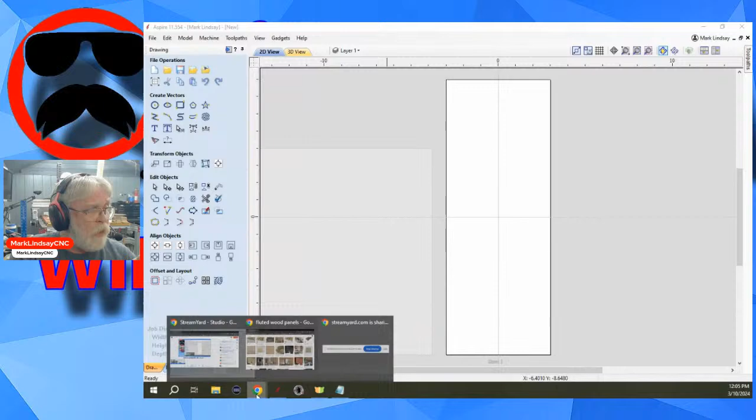That transferred through the ages into wooden architectural elements, be they moldings, furniture legs, table legs, etc. But it's also spawned a little bit of confusion. Now, I don't want to be that guy, but I am that guy. In the strictest sense, we've confused fluting with reeding.

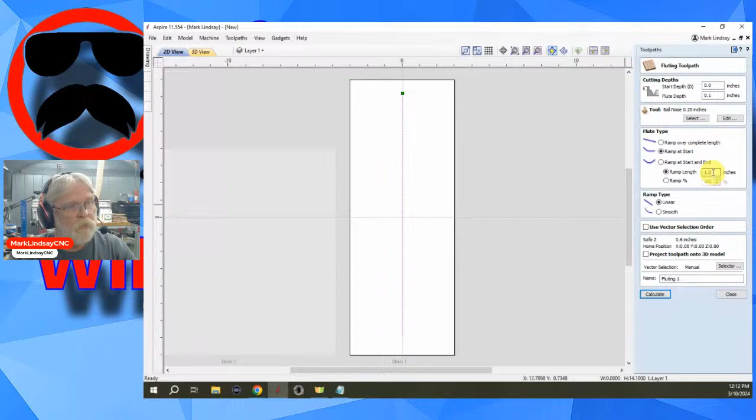Let's look at ramp at the start over a length of 1 inch. I'm going to use a linear ramp, meaning it's going to come down in a linear fashion, just a straight angle over a distance of 1 inch. And I'm going to go ahead and calculate that.

Now let me spin around here a little bit and we can see what that looks like. Again, the red line is a rapid move from 0. Then here's our plunge down into the material. And if we look at it, we can kind of make out there is a little bit of an angle right here. It's not in line with this portion of our toolpath.

Let's slow down the preview a little bit, go about halfway, so we can see what this is going to do. We can see that it went ahead and started its plunge over a distance of 1 inch. By the time it reached that inch, the plunge is finished, and now it's just going to take off and cut the rest of that flute. Then down here at the bottom, it got to the end, then retracted out and went back to 0.

That's probably one of the more basic types of flutes you could use. Let's go back and look at a couple of options, and we'll go into the fluting toolpath.

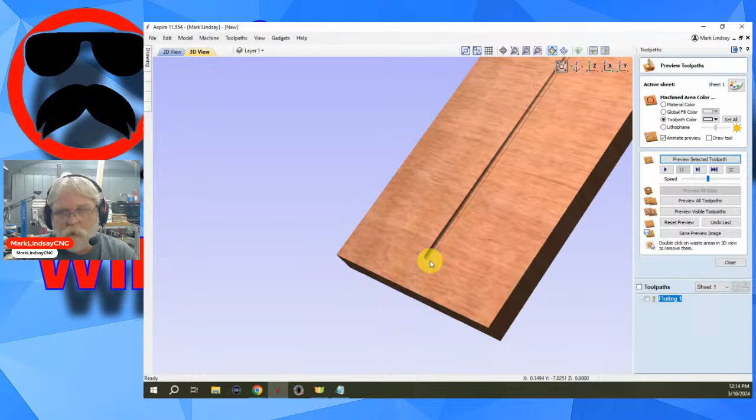So that's a good start on the fluting toolpath, and you can create all kinds of effects with this.

Let's jump out again, go back here, and we're going to ramp at the start and the end. I'm going to shorten this length a little bit, let's make it 1/2 inch from the ends, meaning it's going to start at 0, then plunge down to 0.1 over a distance of 1/2 inch. And I'm going to switch to a smooth ramp, meaning it's going to give this curved appearance with this flute rather than that straight linear appearance.

So we'll calculate that, I'll reset my preview. Now there's something a little bit more remarkable about the appearance of this flute. We can see that it's going to wrap it up from 0, plunge down, and then kind of smoothly dip down over a distance of a 1/2 inch until it reaches our 0.1 cutting depth. Then at the end down here, when we get a 1/2 inch away from the end, it's going to start ramping back up, then retract out.

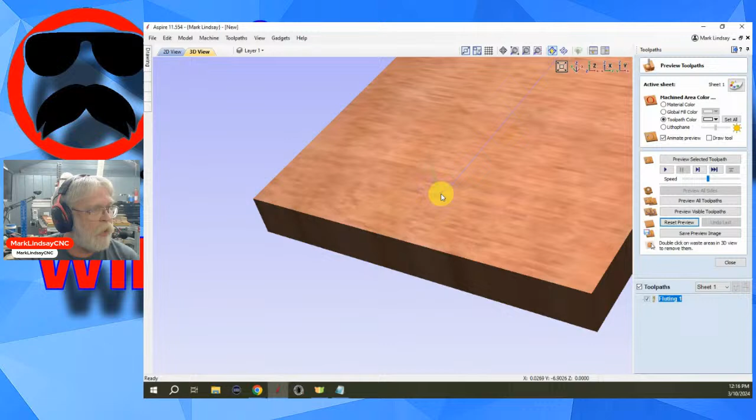So in looking at this toolpath when we carve it, we'll go ahead and preview it. We have a nice smooth ramp down here, then we have a nice smooth ramp back in the center. There we go, a nice smooth ramp up here.

And that's simply by using ramping at the start and end, which generally speaking is the most common, and adjusting our ramp length. You can basically create a ramp length that's equal to the diameter of the bit you're going to be using. Making a ramp that is smaller than the diameter of the bit, while it will work, I have found that it doesn't look right, but feel free to play with it if you'd like.

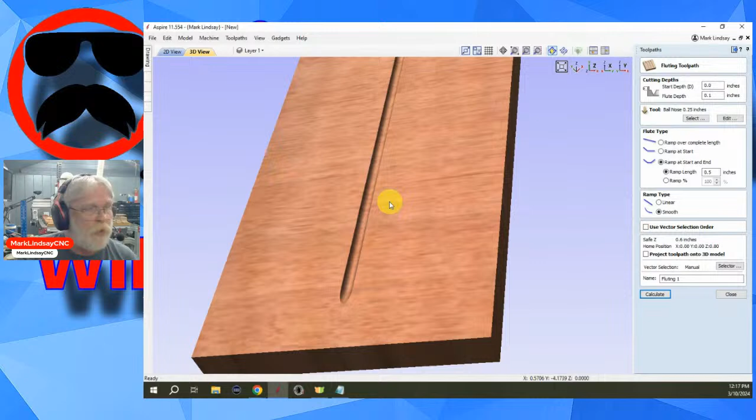Now, fluting is most commonly associated with a concave shape, just a straight ball nose bit, but you're not limited to using a ball nose bit with this toolpath. You can actually create some pretty interesting patterns by, let's use a 90-degree V-bit, and trying for a little bit different of a pattern than just this straight concave. I'm not going to make any other changes. Let's go ahead and calculate, reset my preview, and we'll zoom back out.

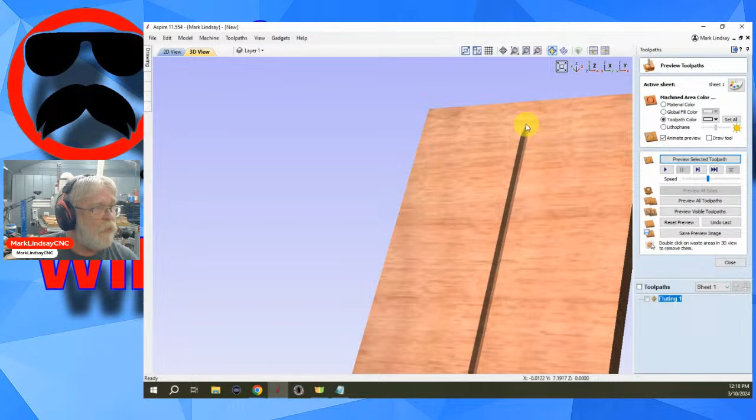And we'll preview that. So now we still have a neat flute, but instead of having that round bottom, it now has a V-groove shape to it. It's still a nice, smooth start here, and then a nice, smooth finish down here. And you can play with this. Again, it's not limited to ball nose or V-groove bits. The only limit is basically your imagination.

Bo is asking, can you create a toolpath for a lamello biscuit through the fluting toolpath? Yes, you certainly can.

What you'll need to do is figure out a length, where you want that ramp to start, how much of a distance, how deep you need it to go. So it'll take a little bit of playing and figuring out, and this is a great opportunity to practice in scrap. You could cut lamello slots on a piece of 2x4 or an old fence board to get your measurements nailed down for each size. For those who don't know, a lamello is a biscuit jointer biscuit. But yes, you could certainly do that.

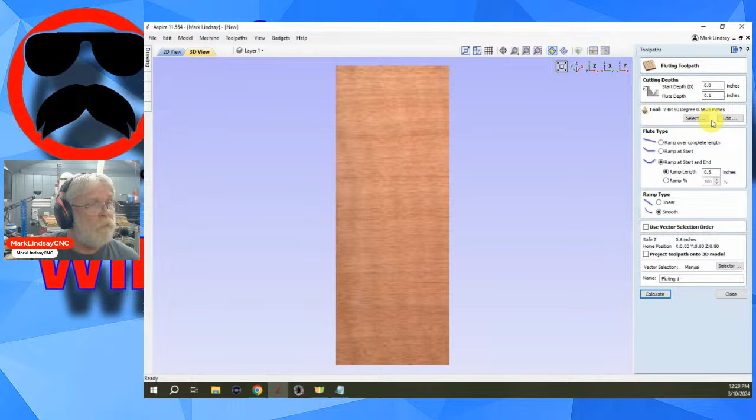Let's go back into the fluting toolpath. Multiple passes for more depth. Okay, now I have a 0.1 depth here. If I look at this particular bit, the pass depth is 0.108. So what we'll do, I'm not going to change the bit. Let's look at a flute depth of 0.25.

So we're going to go pretty deep, and we'll use that same bit. We'll calculate, and now let's take a look at the toolpath. And we see it's going to make multiple passes. Let's slow it down a bit more since it's a fairly short toolpath. So you'll come in, make your first pass, then come back and make the second pass. Oh, that's actually doing 3 passes.

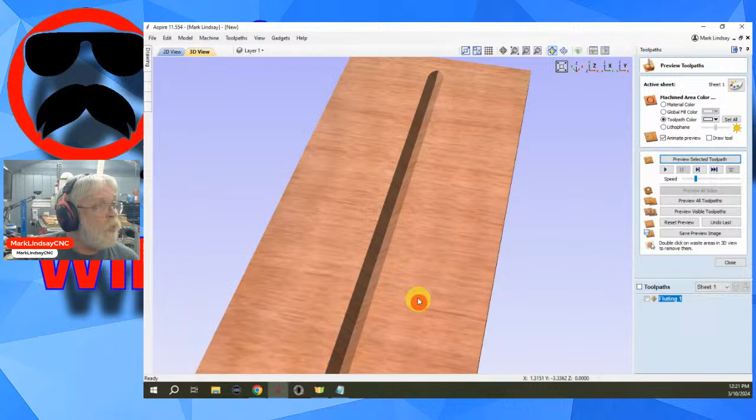So that's all based upon the pass depth of the bit you're using and the depth you have set in your toolpath. But good question, and keep them coming like that. Let me go ahead and reset the preview.

Bill Wallace wants to know, can you flute a cut that is on a circular arc? Yes, you can. Again, it will work with any vector, be it an open or closed vector. It's all in how you want to set it up.

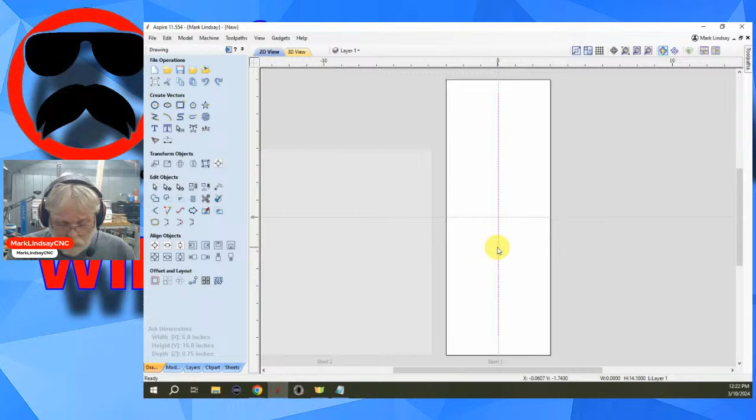Let's get rid of this one here and draw - is that an arc? That's an arc. Okay, we're going to start here, come down here, and pull it out like so. There we go, so we've got that circular arc there. We'll come back, go back into the fluting toolpath and do this.

And I'm going to bring it down to 0.15, so it'll still need to do 2 passes. And I'm going to ramp at the start and at the end like I did. I'm not going to make any other changes here. We'll calculate.

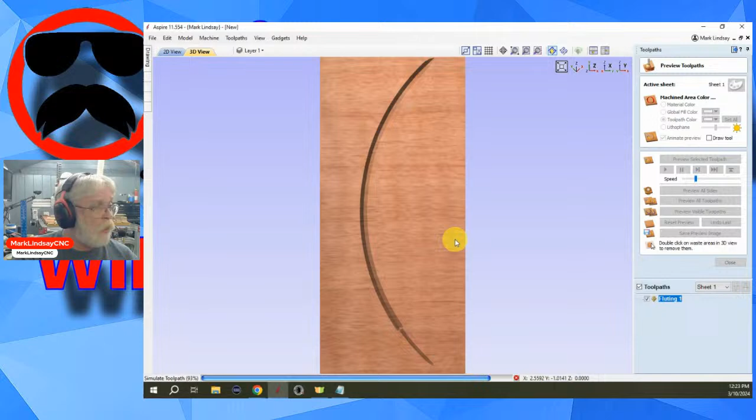And we'll preview, and it's making its first pass, and come back and make its second pass. And again, it will follow any vector, be it circular arc, a straight line, a polyline, or a Bezier curve. All right, so you have a whole bunch of options opening up. Let me reset the preview here, close it, back to a straight Z view.

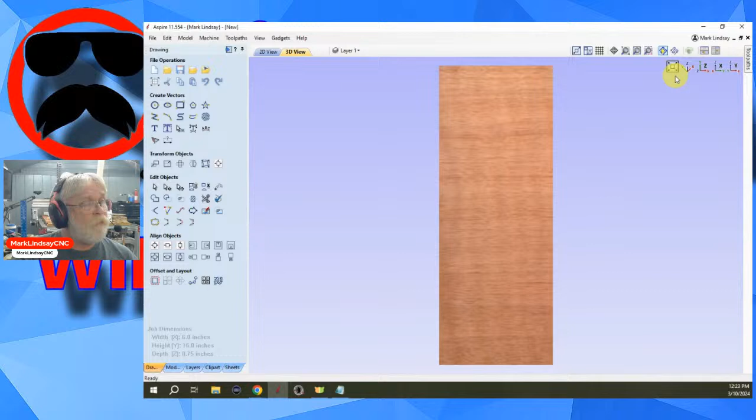In the case of, what if we want a flute that is similar to this, it goes off the end of the material. Well, that's fairly simple as well. All we'll do is draw our vectors oversize. We want to go at least the diameter of the bit we're going to use.

So we'll start up here and come down here. The reason we want to go larger than the diameter of our bit is because we want that plunge to take place off of the material, so that it enters the material from the edge, not from the top. And close that, go back over. I'll use the same toolpath, just change it. Let's see now. You could actually just use a profile toolpath for this - you don't necessarily have to use a fluting toolpath.

But let's say we want to make this ramp over the complete length. We want to start at 0.05. Now, one decimal point - Vectric doesn't like two decimal points. And we'll make that a quarter of an inch. Now let's leave it at 0.15, so it's going to plunge a total of 100 thou.

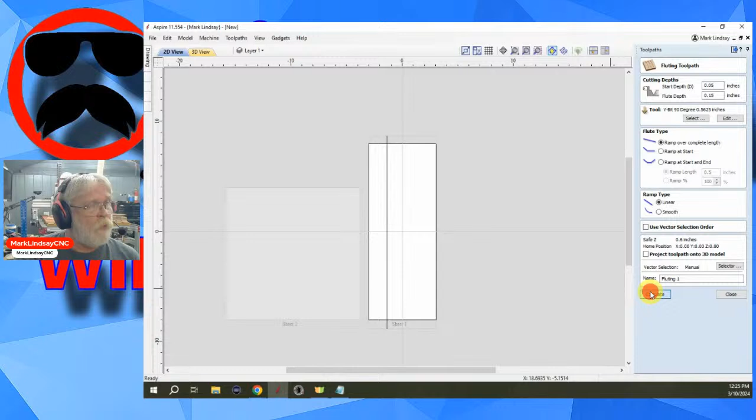And we're going to make it a linear ramp. It's going to ramp over the complete length of this vector. So we'll calculate that - whoops, I got to select the vector, Mark, you've been doing this a week or two. Okay, we'll calculate that. And again, it's going to plunge down here this time. And we'll preview that toolpath.

And we see not only does it start and stop off of the material, but in this case, it started at the bottom and cut deeper here, then ended up shallower here. So, can starting off of the material create tear out? Yes, it can.

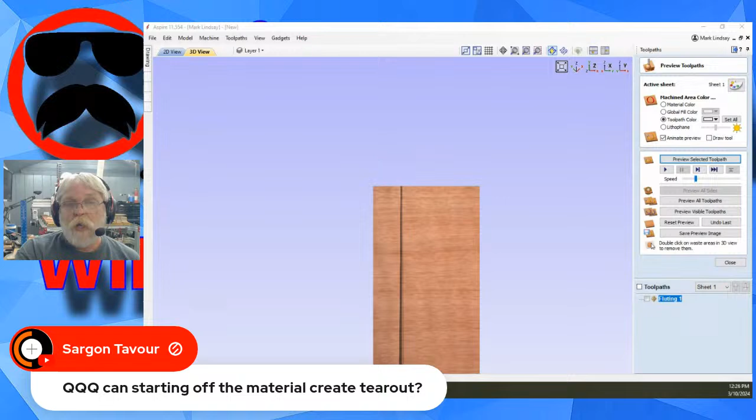It can create tear out. Usually what I do in that case, it just depends on what I'm doing, Sargon. A lot of times if I'm doing something like this and I'm concerned about tear out, I'll make the material just slightly longer than I need and then cut out that tear out. If I absolutely can't do that, then I'll butt another piece up against it. Much like if you're using a hand router or a router table, when you butt that piece up against it, it tends to not chip out. The chip out will happen in that scrap piece. So there is that to take into consideration.

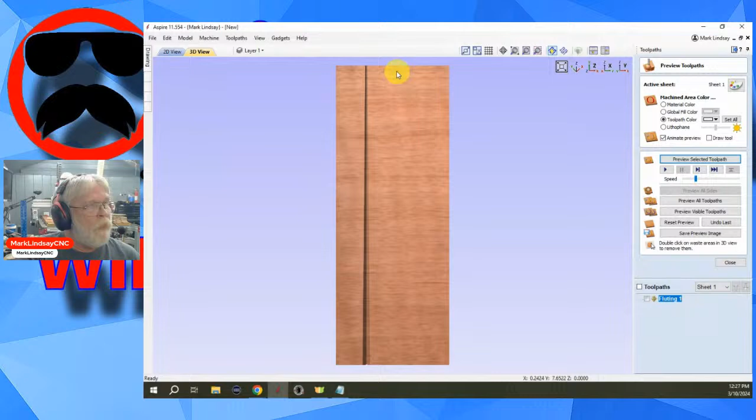Back to Z, I guess I hit the wrong one. So effects can happen. You can create all kinds of different effects using the toolpath. Now, Mike Mazalik has brought up an excellent point here. Just a note, overlapping vectors will cause problems - a figure eight of two circles or an X as an example. Yes, they can cause issues. Now, remember, the fluting toolpath works on one vector at a time.

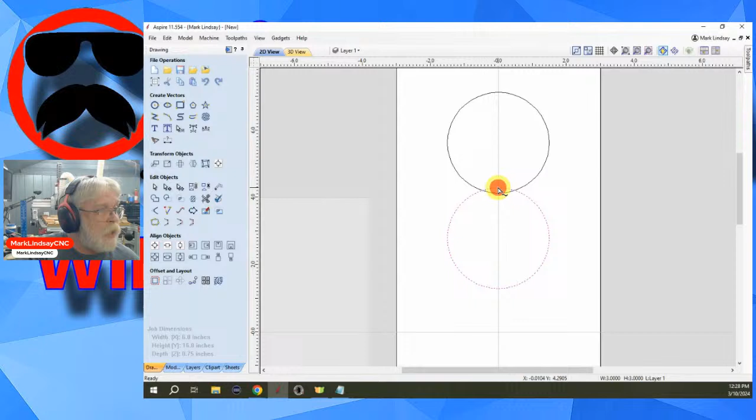So let's take this into consideration, what Michael is talking about. We'll delete that and we'll create a circle here, close it, and I'll just center it side to side. Select that, hold down Control to copy, drag a copy down, and with geometry snapping on, I just snap it right there to the edge. So we have an overlap right there. Now we have two closed vectors, but we're going to go ahead and do fluting toolpaths on both of those vectors at the same time. Again, it's going to handle each vector separately.

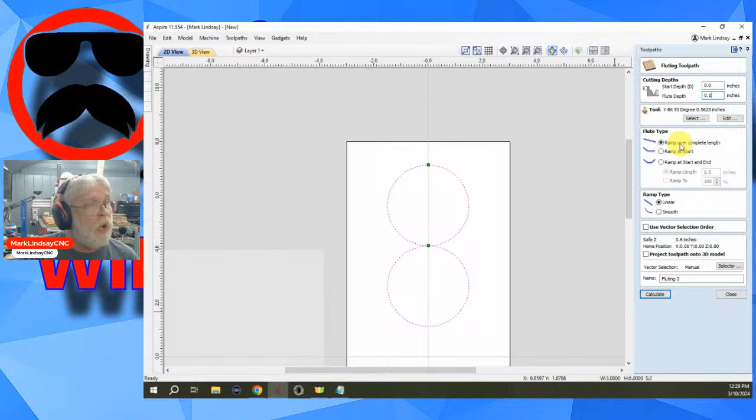We'll do the fluting toolpath and we'll do 0.1, so I'll get rid of that 5. Now, if we take a look here, we've got the green start point up here, the green start point here. That means it's going to start shallow here. It's going to start shallow here. So let's take a look at what we get. I'm not going to change - let me ramp at the start and we'll bring that in for 1/2 inch, so we see what that looks like. I'll keep it linear. We'll calculate, and now we'll preview. It's going to start with the bottom one first.

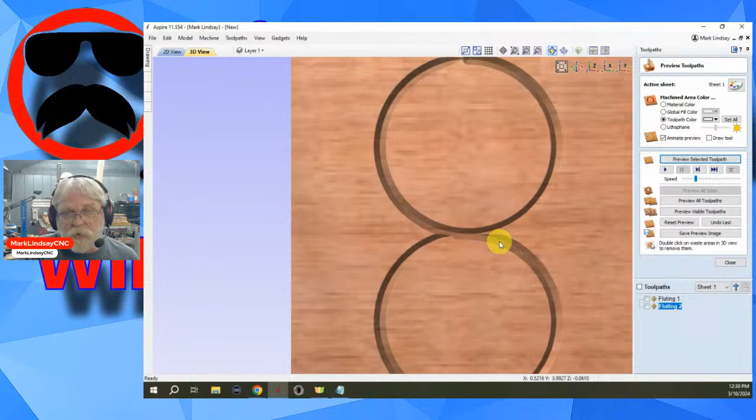Now, first we can see the problem it caused by using a closed circular vector. We have a real shallow start here and no liftoff. So technically that should have been a ramp at the start and the finish. But more to Michael's point, if we take a look at this down here, we have pretty much a mess where this deep carve overlapped with this shallow carve and then met with the deep carve again. So there are various problems in there. Now, if you want to get in and sand that out, be my guest. But we have a depth here of approximately 0.0945, and we have a depth here of 0.0981.

So we're going with different depths, 0.877. We've got a bunch of different depths here. So that's not the look that I would go for. It's not the look that I'm looking for. Just know that overlapping vectors can create an issue. Let's delete that one.

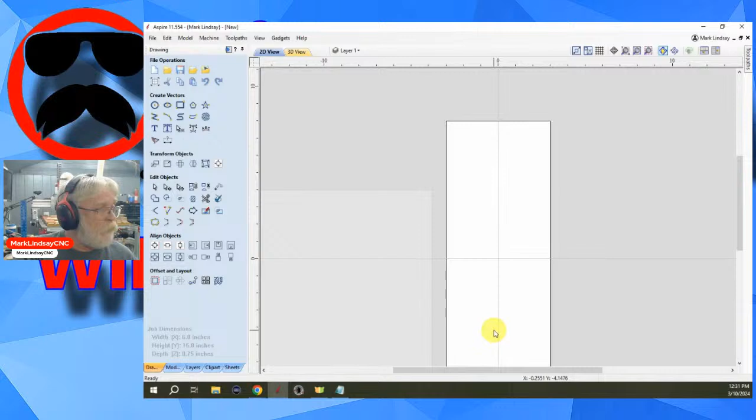Let's go back over and we'll draw a cross here, or an X rather, and let's get 45 degree. Okay, and we're going to wake that one up. We'll come here and we'll come down here 45 degrees. That's good. All right, now let's close that. Come over, we'll go into this fluting toolpath here. And we're going to do start and end to make it look a little nicer. I'm not going to make any other changes - just calculate and see what we get.

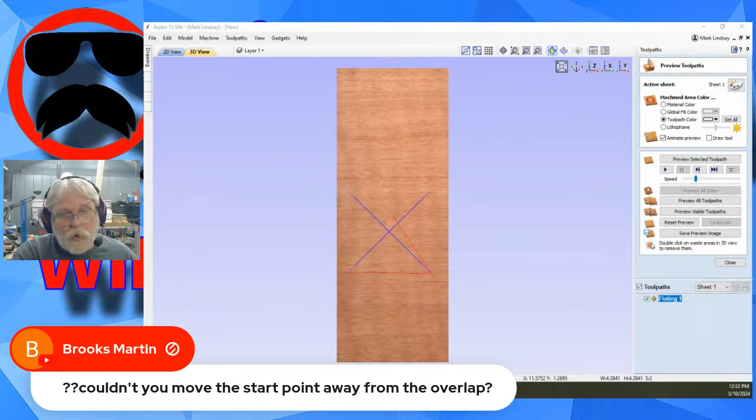Couldn't you move the start points away from the overlap? Yes, I could, and that's a very good point. However, it still creates the issues where those points meet. Let's take a look and see what happens with this one. Basically, it's the unpredictability of the situation. Now, this one looks like it's going to do okay. And yes, it did - that one worked out just fine. That looks just fine. Just know that it can create issues.

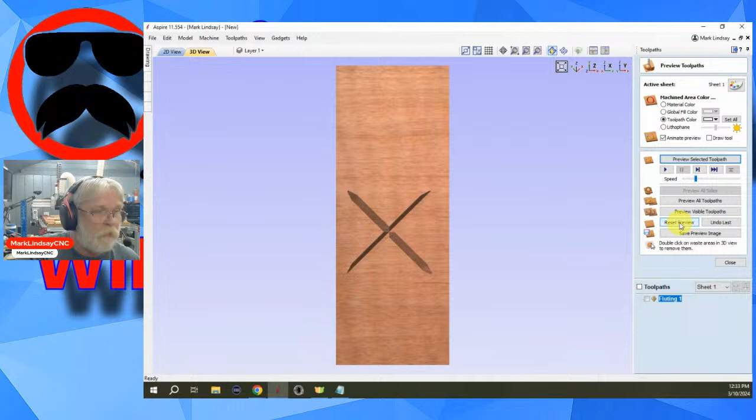There can be slight differences in depth. There can be chip out and break out on some of these points. But this is a case of experiment and see what's going on - just check it out. So it may work perfectly, it may not work perfectly. That's all I'm saying. Let's close that.

Can you not use a ramp? You cannot use a ramp with a profile toolpath. The whole point of the fluting toolpath is that ramp.

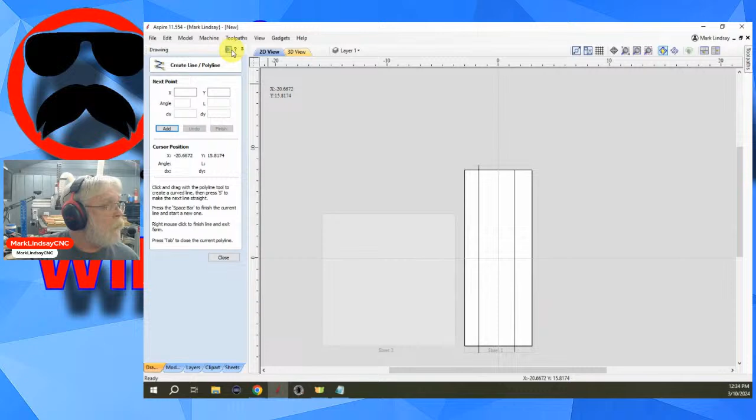Let's go back to this example. We'll delete these and I'll make a straight line that starts here, comes down here, and then another straight line starting here and going down to there. We're going to do the fluting toolpath on this one, ramping over the entire length. I'm going to leave those alone, but I'm not going to preview that yet.

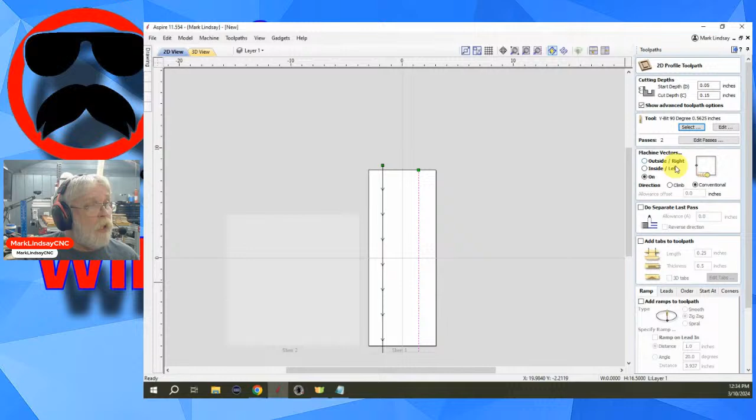If you didn't want a ramp, use a profile toolpath instead. We're going to start at 0.05 and go down to 0.15, cutting on the vector. I'm going to select the same V bit, select, cutting on the vector, and then we calculate.

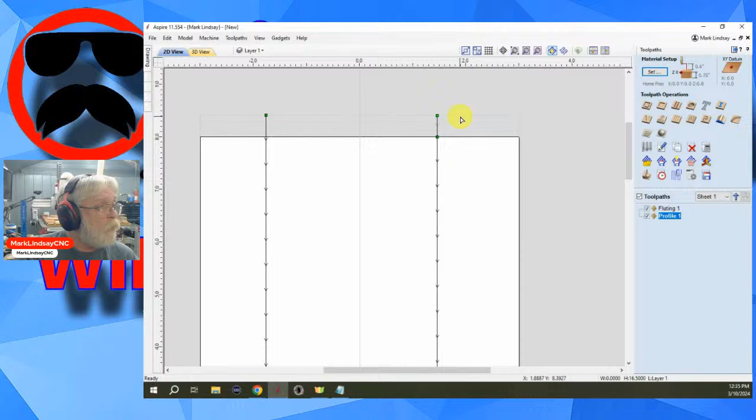Did I make a mistake with my vector? Yes, I did. Let me go back into my profile. I need to bring that up. All right, what am I doing? Boy, let's close this. What am I doing? Control, or let's select this one, go into node editing. We'll get there. Boy, I messed that up. Let me go back over here. Uncheck, that's what I'm doing. All right, there we go. Nope, I just moved it, I didn't lengthen it. Let's drag that down there. Okay, I moved my vector, I didn't lengthen the vector. That was what the holdup was. All right, there we go. Now I have that correct.

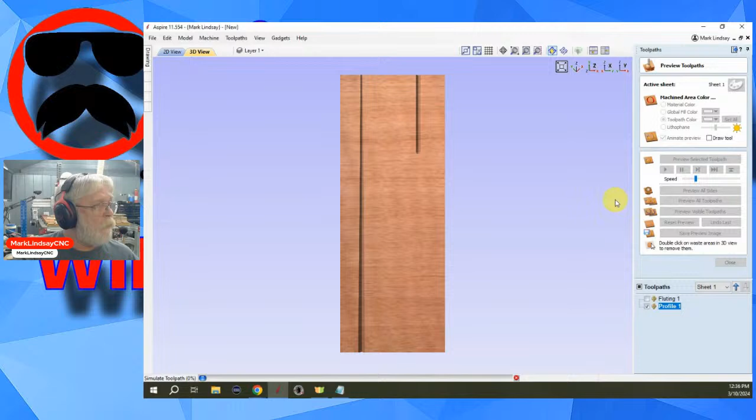And we will calculate that. That's better, okay. Now we'll preview all toolpaths. And there I have the ramp, and here I don't have the ramp. So if you don't want that ramp, you would use the profile toolpath.

The main feature of using the fluting toolpath is that ramp. When that is desirable, you would use the fluting. When it's not desirable, you would use the profile. So hope that helps there, Dan. Never mind all the mistakes I made along the way.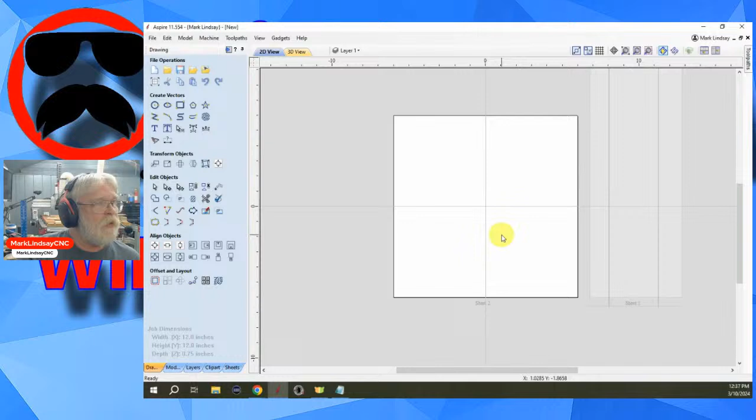Now I have another sheet over here to show you something else, and this has been the cause of quite a few questions that I've had. That is about using the fluting toolpath to do a ramped in, basically to hollow it out. How do you make that ramp wider? This is what I mean when I say a fluting toolpath works with one vector at a time.

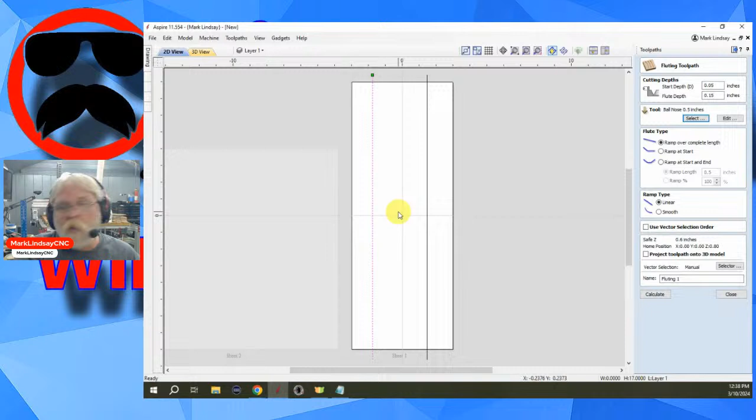To make a wider flute, you have two choices. One is to use a larger bit. So in this case, the way I would make this wider would be to use, instead of a 1/4 inch ball nose, my 1/2 inch ball nose, and that would make that flute wider. If I needed wider, I could move on to a 3/4 inch ball nose or core box bit, or I could move to a 1 inch or 1.5 inch. That would give me that nice smooth concave I'm looking for, and I could adjust the depth to suit.

Well, what happens if I use 2 vectors? If I use 2 vectors, the problem then becomes the cusp down at the bottom of that flute. Because you have a round bit carving, then you have a vector next to it carving, you're going to have that point where the two tips meet. And that's what's going to give you this pattern here on a much smaller scale. Now you can do it, but you're going to need to use a lot of vectors, seriously a lot of vectors. Now it can work, there are a couple of issues though, and we'll get into those right now.

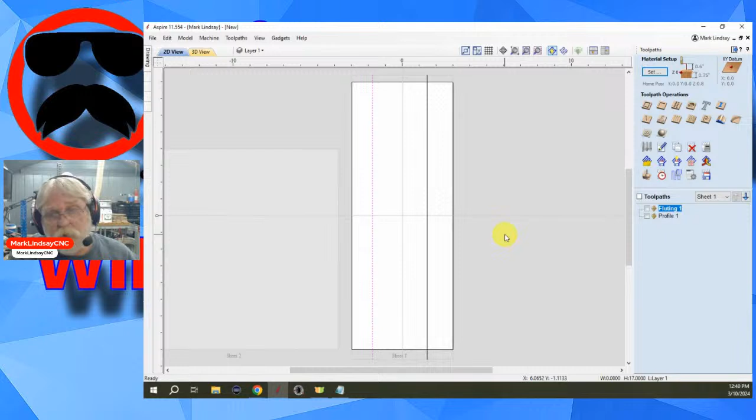Also, you don't have to use a ball nose bit, you can use a standard end mill. So that's where this sheet comes in. Let's go ahead and get over here and create a rectangle. I'm going to make that width in X - let's make it 8 inches wide, and let's make it 3 inches tall. I'm going to anchor the center on my X0, Y0, and we'll create it. Okay, so I've got my rectangle here.

I can use this rectangle, but it's going to follow the perimeter. Well, what if I want to ramp this entire section down? Can I do that? Yes, I can. I can use a standard end mill, but what I'm going to have to do is create vectors from side to side.

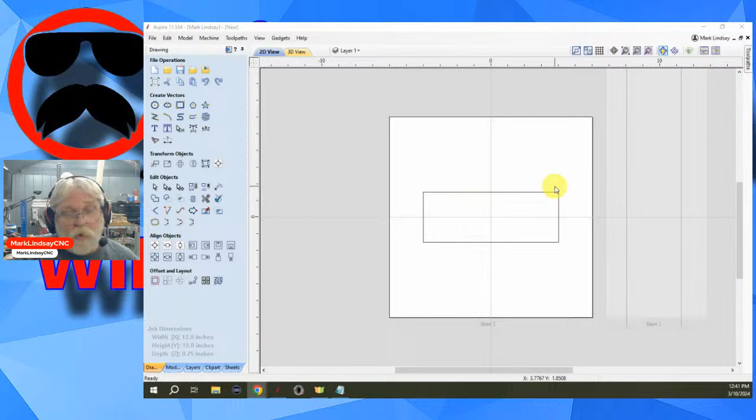Can't you just use a bowl bit? Certainly, yes you can. But let's say, for the sake of this, I want square sides. I don't want that radius. I want square sides along the edges.

I can cut this out, but I'm going to use a couple of vectors here as a demonstration. What I'm going to need to do is come down, and I'm going to use a guide for this. I can't drag a guide, so I'm going to put a guide here, and now I'm going to move it down.

I'm going to use a 1/4 inch end mill, so I need to take half of that. Half of a quarter is 1/8 of an inch. Because I'm making a negative move, I'm going to say minus 0.125, equals, and I'll apply it, and that's where my guide is.

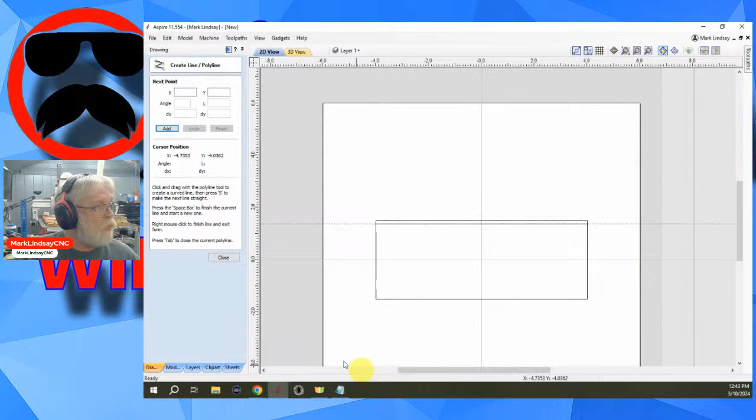Now I'm going to come back and draw a vector right there. No, get down here. There we go. No, not there—right there on that intersection. Then I'll zip over here and draw it right there, and spacebar to accept that line. And I'll delete that guide; I no longer need it.

So I now have a vector here. I want to carve out this entire area here. I've got a 3-inch wide piece, and I've got a 1/8 of an inch radius on my tool.

So I'll select it, and I'll come down here and create a linear array. Now I want rows in Y. I do not want columns in X. I'm not looking to move over this way; I'm looking to create them down. So I want one column in X.

I'm sure there's a way to figure out exactly how many of these vectors I'm going to have to place 1/8 of an inch apart times 3. So let's take 8 times 3 and call that 24. I'll go with 24 rows in Y, and let's see what that does—3 inches wide, 8 per inch, 8 times 3 is 24.

I'm going to put a gap—nothing in X, a gap of 0. I'm going to put a gap of 1/8 of an inch in Y. Because I'm starting at the top and moving down, this is a negative move, so that needs to be negative 1/8 of an inch. So it's going to create 24 more vectors down this direction. We'll click copy, and there we go.

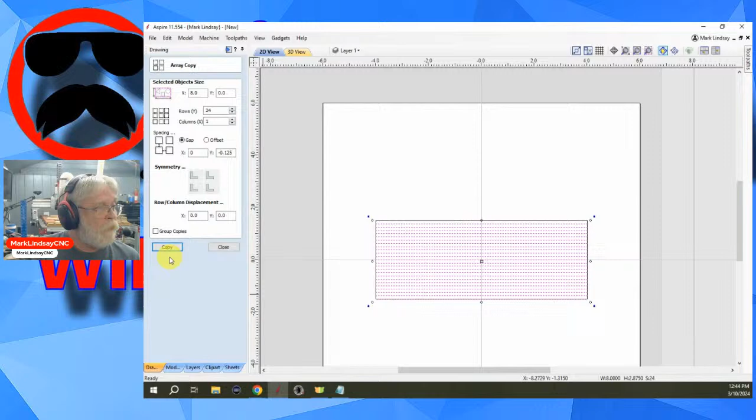Well, I could have done 23—I don't need this last one here. Hold down Shift, deselect my rectangle, then I can hit delete, and that deleted that last one there. So now I have all my vectors.

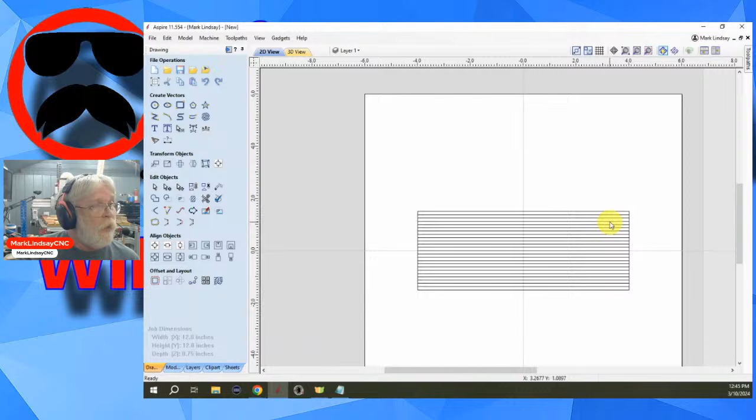I can go right here to right here, select all of those, come over to my Fluting Toolpath, and make sure that all of my start points are at the same end. I want to ramp over the complete length, I want it to be linear, and I've got my depth, 0.15.

We'll calculate, and we can see what the bit is going to do. Now I'll preview that. And I made a mistake—stop, reset the preview. I didn't change my bit.

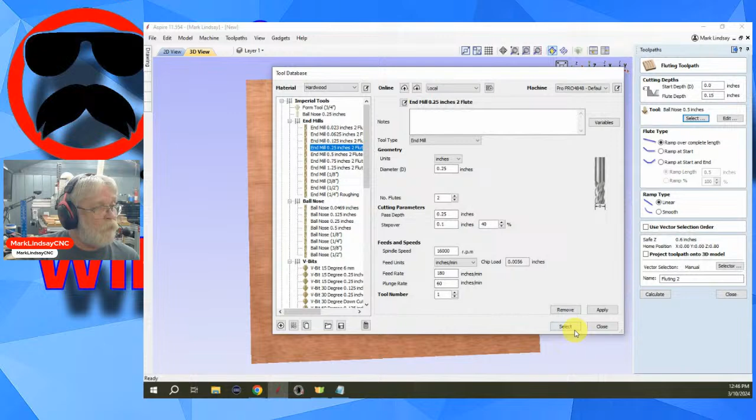Let's go back to a 1/4 inch end mill. There we go. Select, calculate, now we'll try that. Let's preview—there we go. That's better. Okay, and we see what it's doing now: it's starting up here and gradually sloping down.

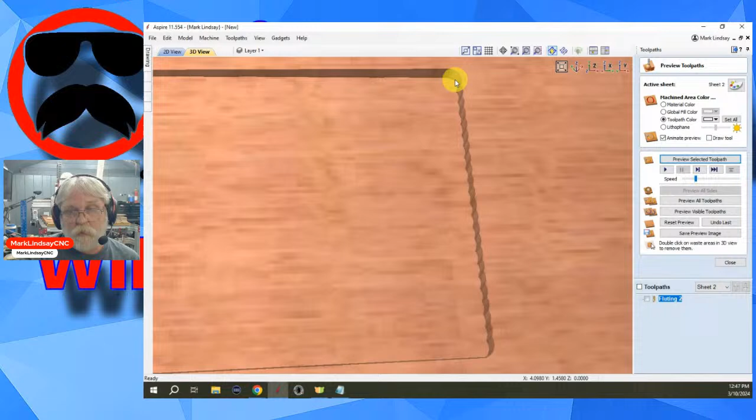Now this does work, it works very well, but there are two problems. I don't know if you can see—I'm going to try to get this into a position that you can see this. But we have two issues down at this end. My sides here are nice and straight, but now I have a flat spot right here where these tool paths ended, because we're dealing with a round bit. I also have a jagged edge here where all of these cusps met, where all of this was left behind because of the radius of the bit.

Now that happened because I used a spacing of 1/8 of an inch, half the diameter of the bit. You can pack these vectors in tighter—instead of 24, we could go with 48, we could go with 96, and really jam these in here together. It may work, but that's a lot of step over, or a real fine step over.

Well, let's go ahead and give it a try. We'll close that, let's go back, and I'm going to Control Z until I eliminated those. And I'm going to zoom back in to this one here. Let's double—let's just go to 48 instead of 24. I want to move this down now, I'm going to make it a 1/16 of an inch.

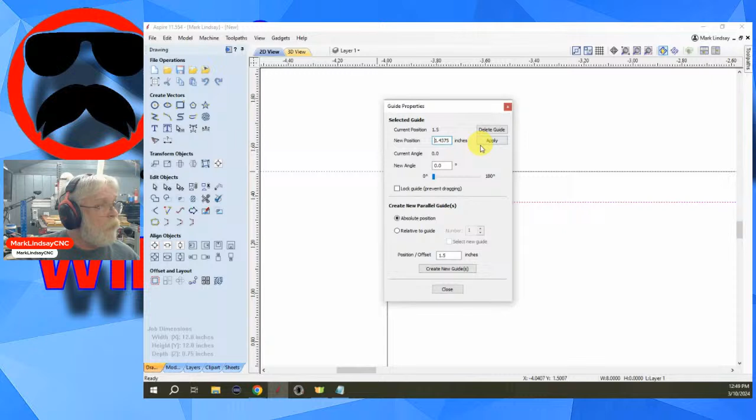Minus 0.0625 equals, we'll apply that, close, and now I can move this vector right up and snap it to that guide. Close, then I can delete that guide.

Now I can select this. We're going to go with 48. Nope, we're going to go with 47 because I don't need that last one. So we'll go 47, and we're going to change that to negative 0.0625. Copy. Close. Now with them all selected, I'll probably have to reselect, and I did.

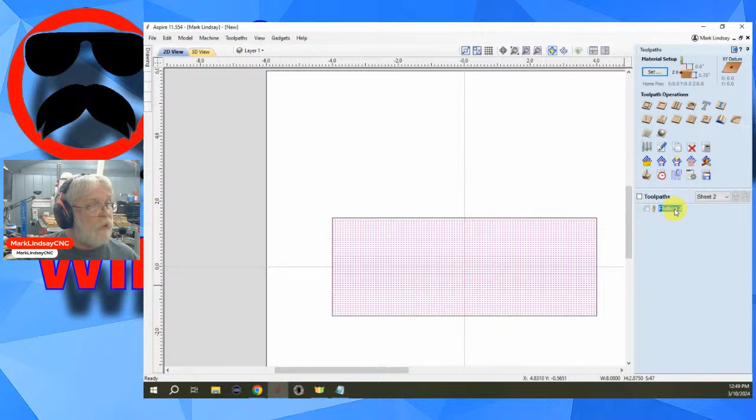Hold down Shift and select all the rest of these. Start points are all in the same place. Calculate. Now let's preview. Stop.

I didn't reset my preview. There we go. Now let's preview. So we're moving over by smaller increments each time.

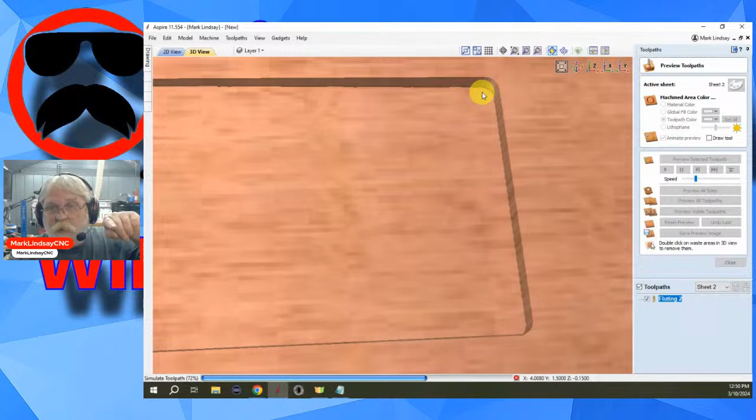And we're still going to have this cusp down here on the end. We're still going to have the flat spots, but it's going to be less and less obvious the closer together we put those vectors. But my point in this being that you're going to have a flat spot because you're dealing with a flat end on that end mill, and you're going to have these cusps because you're dealing with the radius of the bit.

Now we could tighten this up again so that we have 96 instead of 48 vectors. And you can keep going, basically until the cows come home, or until these cusps are so small you really don't see them. Now, machined in wood has a very good point here to be made.

You can put an L at the end of those vectors to reduce the cusping. What he means by that is, and it's an excellent point, it's a great tip, we've got this figured out that these little cusps are going to be approximately a 1/16 of an inch apart.

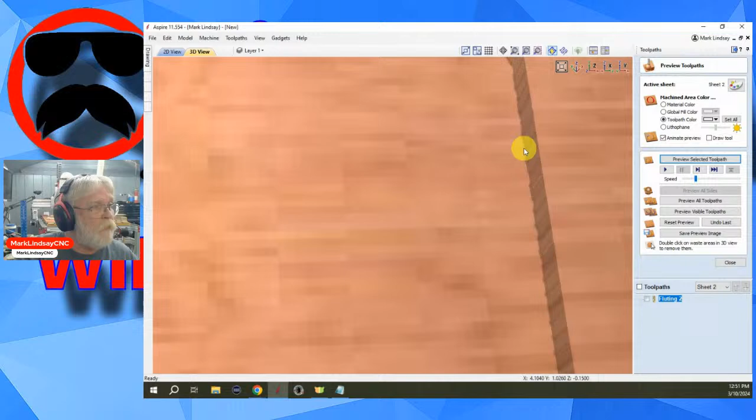So if we go back to our vector, let's reset the preview so I don't do that again. We go back over here, Control Z. We take this vector right here.

And let's see, we'll just go ahead, we'll add, start right here on the end of that vector, and we'll come down. Let's go, see, we're going to come down about a 1/16 of an inch. Let's do 0.0635. That's good enough, that's a little bit more than a 1/16 of an inch.

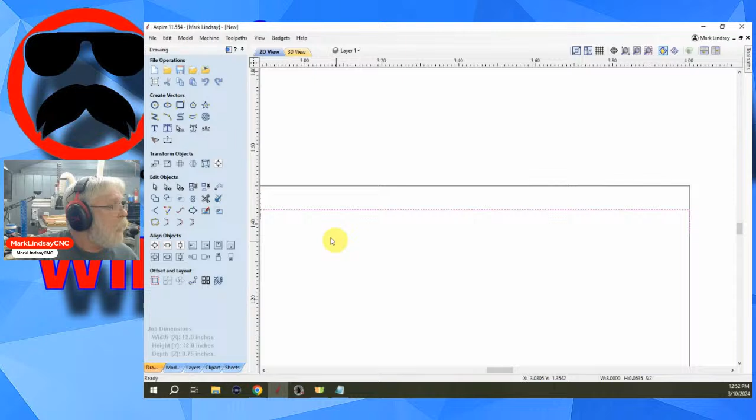Close. Now I'll select these two vectors, hold down Shift and deselect my rectangle so I don't have that. And then I'll want to join. I've got two open vectors. I want one open vector. There we go. Close. And then I'm going to have to modify the one on the bottom after I do this array, because otherwise I'm going to have a vector sticking out down here.

Okay, so we'll go to the array. I'm not going to change anything. We'll copy. What did I? Oh, whoop. Control Z. I need to come back in and have that because I added.

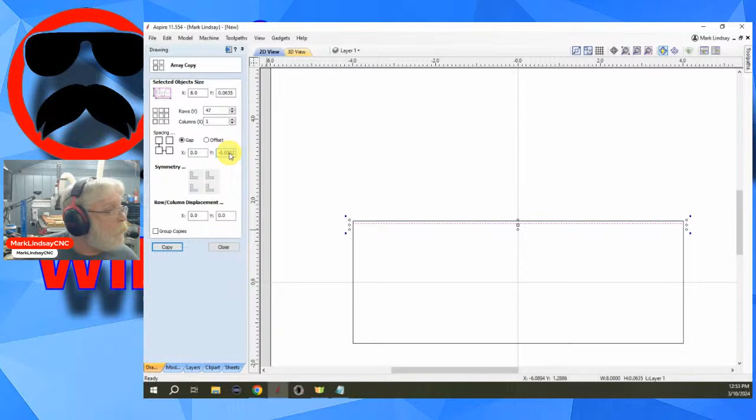So we're going to go with 0.3125. Copy. And it's still too many. But come down here and we'll delete these. Delete this one. Whoops. Yes.

And now this one here, I'm going to node edit, go in, and I'm going to delete that span. Well, actually, I can delete that entire vector. I don't need to do that. Never mind, I can delete that entire vector, it's not necessary.

Okay, now let's close that. Go over, close the preview, go into the toolpath. Select all of these, calculate, and now let's preview. See how it's making that little hook right there?

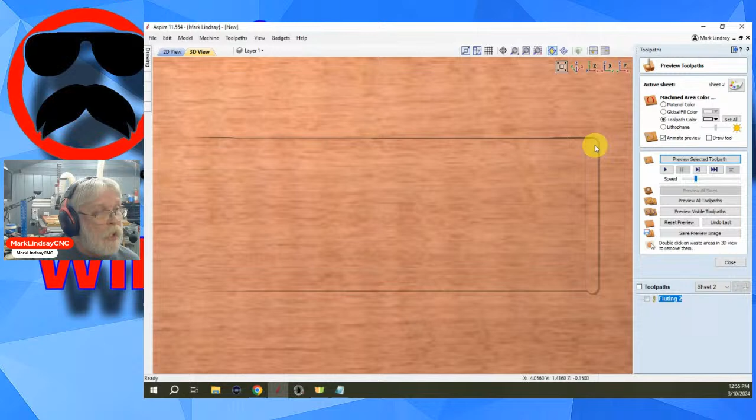Just kind of making a little bit of a hook right there. Yeah, I need to put one more straight vector down at the bottom, but you get the point. Putting that little hook in there, as machined in wood pointed out, eliminated that cusping. It didn't eliminate this flat spot, not at all, but it did eliminate that cusping.

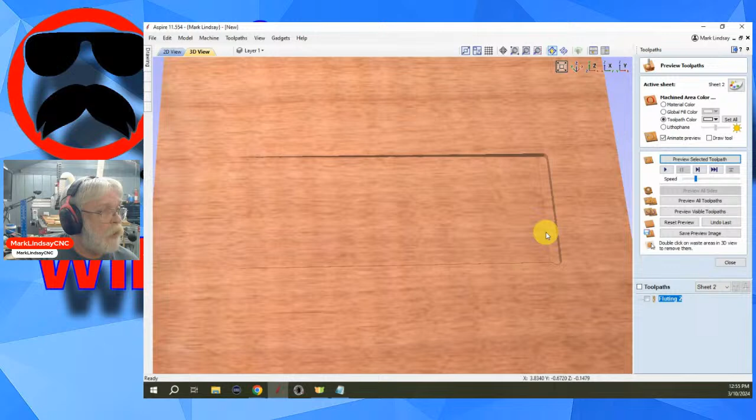And I would need to put another straight vector down in here to get closer to the edge of my rectangle, but you get the point. There needs to be a little bit of playing around with this design, but that's all based on the fact that there is no cleanup pass that you can really do here, unless you want to put a vector down here, say 1/8 of an inch in, and get it set to absolutely 0.15 deep and do a profile toolpath to kind of come back and clean that up, cutting on the vector.

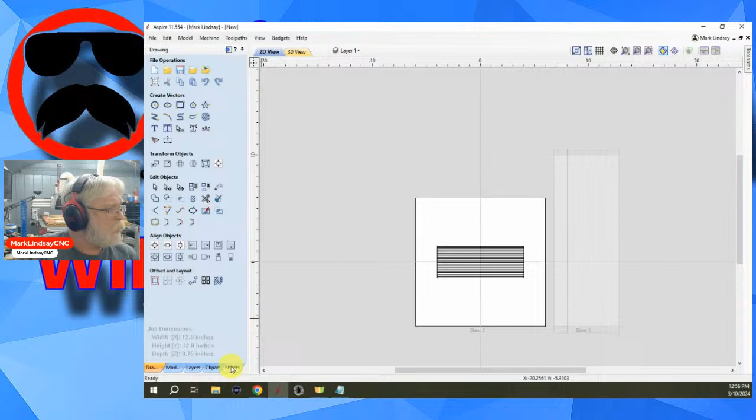But there are ways around this, ways to make it work for you. Let's see what we're looking at - we're about an hour in. Now I'm going to make another sheet over here. We're going to do one more example of something, because there are a few cases where - when am I going to use this in real life? Well, I'll show you. Let's do a cutting board.

I'll just go ahead and call it sheet 3. I've got that sheet selected. Let's edit it, and we're going to make this board 12 inches high. Let's make it 20 inches wide by 12 inches high. And we'll make it 2.5 inches thick. So we've got a nice cutting board here.

All right, go back into my drawing tab. Now I want to make a juice groove. Well, juice grooves are fairly simple. If you are just making a standard juice groove that's going to catch everything, you don't need that ramp, you don't need the plunge. What you're looking at then is simply drawing a rectangle.

I'm going to go 0, 0, and let's make it 1 inch narrower than the board in X and 1 inch shorter in height. So we'll go X minus - let's make it 2 inches, I wanted an inch in. So X minus 2 equals, and Y minus 2 equals, centered on my X0, Y0. Create, and there's my juice groove.

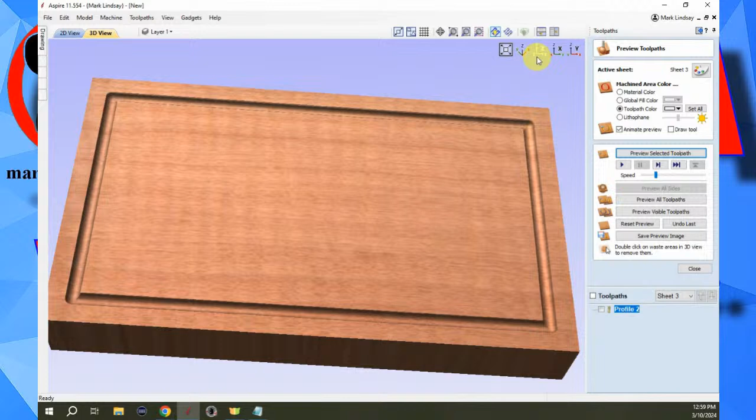That's all well and good. That's going to turn out nice. That's a cutting board that I'd be proud to make, no big deal. But let's add a couple of details here.

Let's come back to my cutting board. Let's say down at this end, I want a little well. I want to taper these sides of the juice groove and channel all the juices down into a little well here. So what I'm going to need to do is pocket out a well.

So let's start about right here and go to about like so. We're going to change that. I'm going to anchor it here on this corner, and I'm just going to make it 2 inches even. And we'll apply that - so I've got about a 2-inch well here.

Now, when I go to make this juice groove, I've got to remember that I'm using a 1/2-inch bit. So I'm going to have to take that into account so that the edge of this juice groove isn't out here with my well down here. So I'm going to make this just a little bit taller, and anchor it at the center. Let's go with 11 inches tall. Now when my juice groove gets cut, the edge out here will be inside this well.

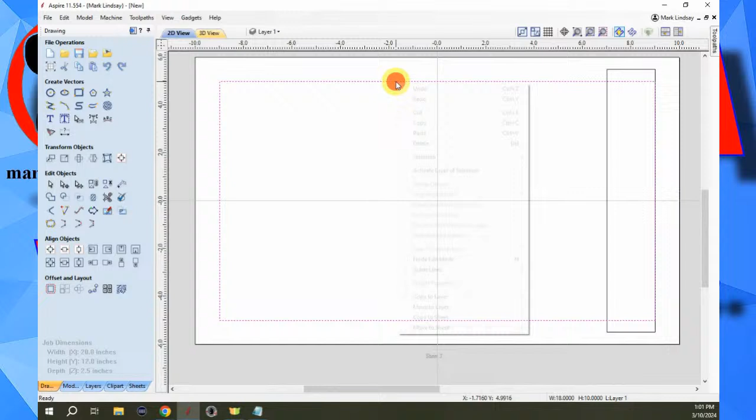I'm going to copy this rectangle to another layer - a new layer, call it layer 2 - and we're going to make this blue, a lighter blue, so that we can see the difference in color on the monitor. Then I'll click OK. Now what I'm going to do with this is go over, make layer 2 active and turn off layer 1. I'm going to select it, go into node editing, and delete that span. And I'm going to delete this span.

So now I have 2 separate vectors. Now I need to be careful and take a look at my start points - my start points are over here. I want to taper this way, so I need to make these my start points. Make start point, and make start point. That way we'll start at my cut depth here and work our way down.

Okay, so now I can come out of node editing, go back, turn on layer 1, make layer 1 active. And I made another mistake. My rectangle here is going to end right here on this end of the well. It doesn't need to do that. In fact, it needs to end somewhere in here because there's no need for this fluting toolpath to go all the way over here. So let's put that into move and transform mode, go about like so, and that's good enough. Now I'll go into node editing again because there's no reason to let this cut air right here.

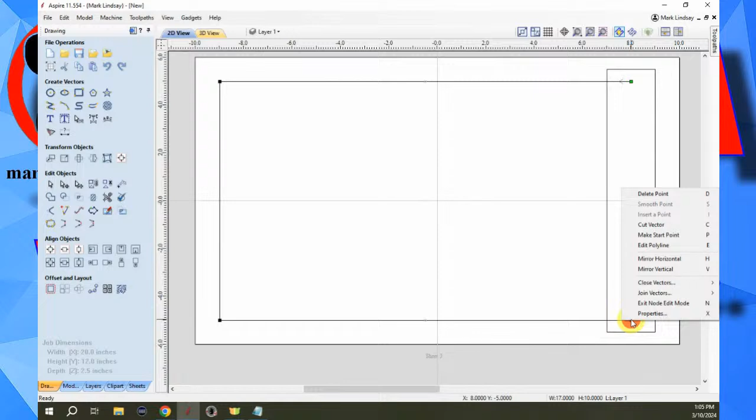Let me turn off my other vector. Turn off layer 2. This is one of the reasons why I use layers so much, is because I could not select this point without it interfering with the other. Now, why is it not letting me make that a start point? What is going on here? I can make that a start point. I can't make you a start point. No, because it's an open vector. That's why you can't make that a start point. Okay. Exactly, it's an open vector.

But that's okay, because the way I'm going to treat this, I'm going to treat it a little bit differently than I would... never mind, I just confused myself. All right, let's bring back layer 2, because now I need to shorten these because I did the same thing. So let's grab hold of this, drag it to the same distance, grab hold of this, drag it to the same, snap it to the same place. Now that I have you totally confused, we're ready to calculate some toolpaths. And I know you're saying, what the what?

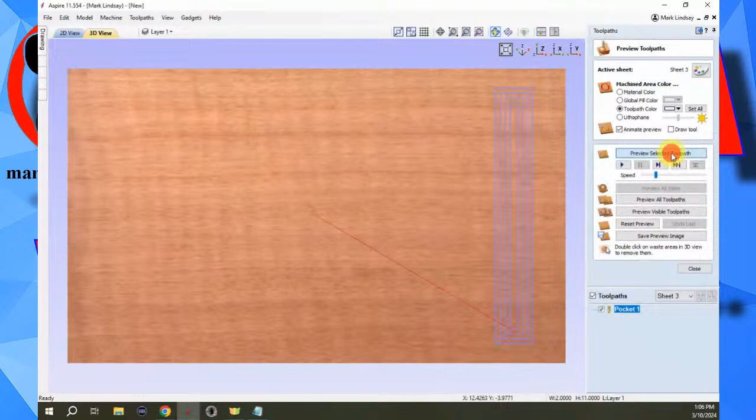Well, let's do it. We're going to reset the preview. We're going to close this, and we're on sheet 3. I shouldn't have. Oh, yes, I should have. That's right. I'm going to go ahead and delete that toolpath. All right, select this, and I'm going to do a pocket. I'm going to cut that little well down there, and I'm going to make it 0.5 deep. And I'm going to use a 1/2 inch end mill to cut that pocket. Select, and I'll go ahead and do offset because it is a round, more or less, pattern. And we'll calculate that. That's going to cut the juice well into the cutting board.

And this can be kind of a harrowing experience if you put a lot of work into making an end grain cutting board. Trust me. Get it all nice and pretty and sand it up and ready to go, and then cut a big hole in it. All right, so we've got our juice well here, and it looks pretty good.

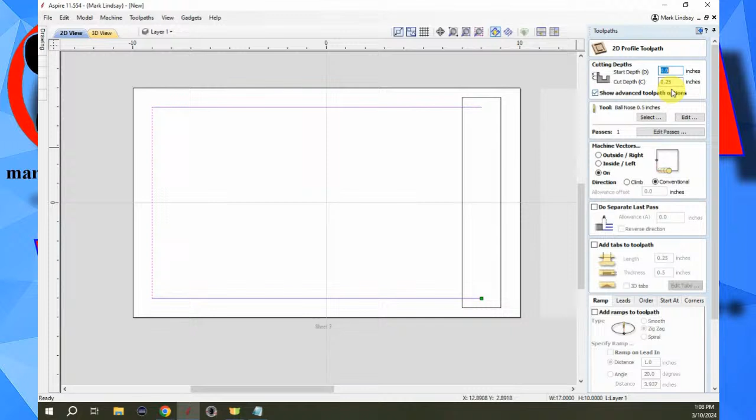Now I'm going to take the rectangle here, and I'm going to create a standard 1/4 inch juice groove. That's going to do two things. It's going to give me a start depth up here, and it's going to give me a straight groove right here. It's going to act as kind of a clearance pass for these two sides, my flutes. So close that, and I'm going to use a profile toolpath, again cutting on the vector, again using my 1/2 inch ball nose, and I'm going to go for a 1/4 inch depth.

Okay, and we'll calculate that, and then we'll preview it. So my juice groove ends up here inside this well. I could adjust things, make that a little bit smaller so that this edge, it looks like it drops straight down along with this edge. But I think I prefer this. Now I'm going to close this, go back into my 2D view,

and I'm going to open up the flute. I'm going to deselect everything. I'm going to open up the fluting toolpath, and I'm going to start my start depth at 0.25 because I want it to start in that flute that I've already cut, in that groove that I've already cut. And I want to make that depth, I'm going to make it 1/8 of an inch. So the end of the juice groove is going to be 3/8 of an inch down from the surface. I'm going to ramp over the complete length.

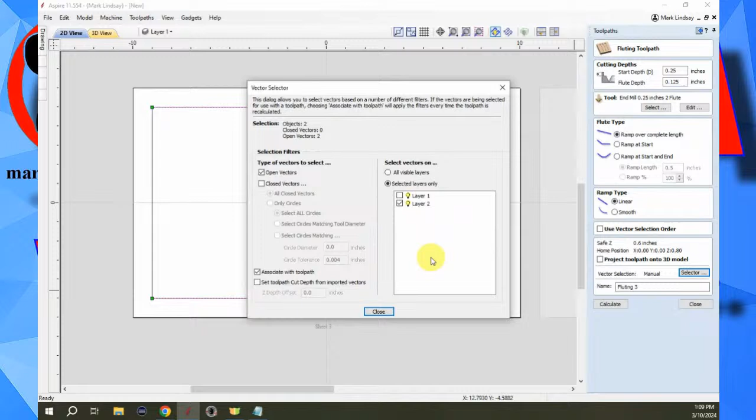I have no vectors selected out here. I'm going to do an associate with toolpath. This time I'm going to select the open vectors on layer 2. And I'm going to associate it with the toolpath, close, and now these will start down in that juice groove and cut another 1/8 of an inch down that ramp over the entire length. Calculate, and we'll preview.

And I didn't change the bit. Undo last, let's go back.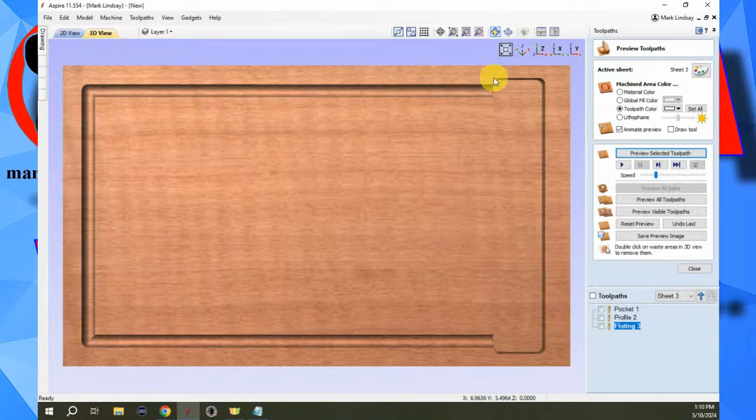I used my 1/4 inch end mill, then my 1/2 inch ball nose. Select, preview early, preview often. Now we'll preview that tool path, and we see that it made 2 nice round bottom flutes down into this well. They're the same width all the way across, they don't taper outwards. But now I have a tapered channel that runs down into this well.

Eighth Center says, to make this practical, you should really split the left line into 2 and flute them so they both run towards the channel that then runs into the well. You can do that, and what Eighth Center is talking about is you would...

Split this rectangle into 2 open vectors right here and kind of extend both of them so that they overlap, so that the juices run down here this way and then down here. And you can do that.

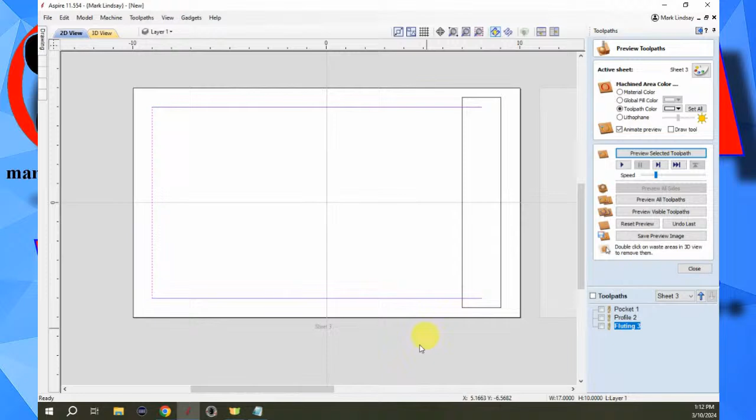I personally don't like that look, but it's 100% up to you. The reason I say that is what you'll find is up here at this end where these 2 meet, your flute is going to be narrower because it's using less of that - I'm using my hands so you can see me - your flute is going to be narrower right where this intersection is, because you're using less of that ball nose bit to cut shallow. It just, to me, it looks odd.

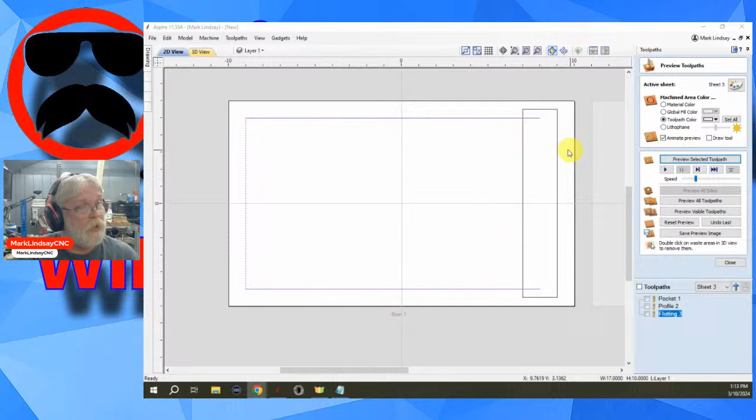And let's remember how water flow works. You're not trying to eliminate 100% of the juices that are in this channel, you're trying to channel excess down into here. So as it's flowing this way, it's going to draw the juices out of here because water is going to take the path of least resistance. Rather than building up here, it's going to follow the shortest path to get down into this area. So basically that's what I'm getting at.

Now, if you're not much for the 1/2 inch, I can change that up a little bit, make it a little bit wider because that is pretty deep, you got to admit. So let's reset the preview, and I'm not going to touch the pocket, that's going to be fine.

For the profile, I'm going to swap out the ball nose for my 3/4 inch bowl and tray bit. Select that, and then we'll calculate. Then for the fluting, I'm going to use the same bit - switch over to my 3/4 inch bowl and tray bit. Select that, we'll calculate.

I got nothing to add to that. Okay, I got nothing, Sargon. That's civil engineering storm drain design. Yeah.

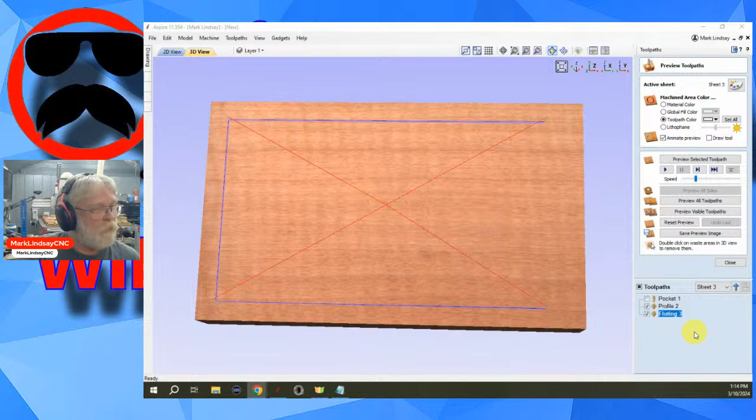Okay, I've changed the bit for these 2. Now we'll just go ahead and preview all tool paths and see what we get. Here's hoping I didn't make a hash out of the whole ding dong thing. Again, this is why I say preview early, preview often. If it doesn't look right in the preview, it's not going to get better when you go out and start cutting material.

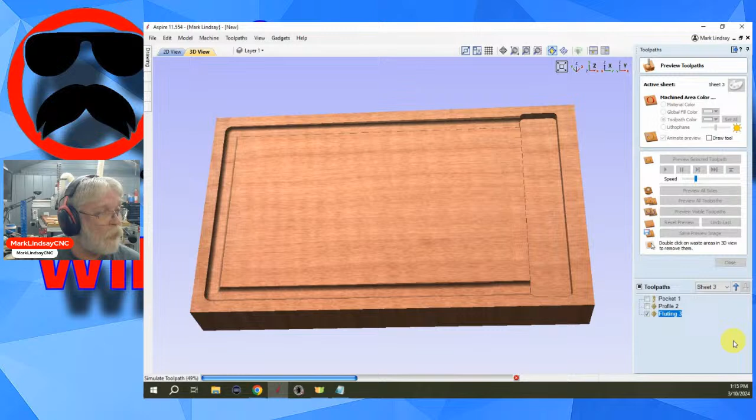And there goes my, for all intents and purposes, clearance pass. And now there is my cut depth - I needed that one. Now there is my taper, there is my other taper, and now we have that.

So you've got a wider channel and things are going to drain down through this cutting board into this well here.

If you really, really want to get fancy, one could draw a vector from, say, here - just draw a vector at a 45-degree angle right here at one corner. Use this same bit on a profile toolpath, cutting on the vector, and make a little pour spout. We can go ahead and preview that.

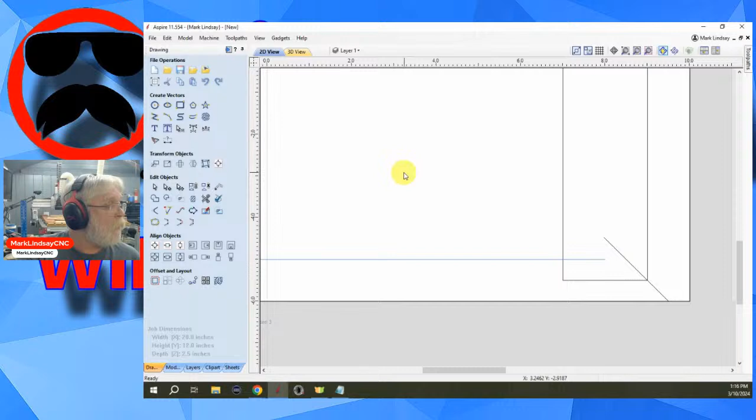Let's draw a line, let's say from about here, going at a 45-degree angle to about the middle. Yeah, that's about right. Okay, so I've got that vector there. Close. No, technically that should be longer than that - it needs to be at least the radius of the bit.

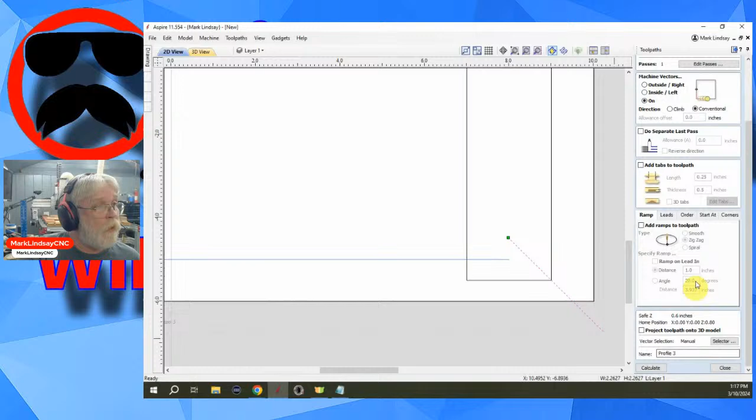And we'll make that the start point. Okay, we're good there. Come over here, and with that selected, I'm going to do a profile. Yeah, I'll go with 1/4 of an inch. And I'm going to use the same bowl and tray bit - no, I'm not, I'm going to use my 1/2 inch ball nose. Select. And carving, again, carving on the vector. Calculate. And how deep did I go?

Yeah, we'll do that. And there's your pour spout. Okay.

Scrape the juice off into the sink with a carpenter scraper. Well, you could do that, you know. I'm sitting here trying to turn this on a different screen. It just all depends on how fancy you want to get.

Now that actually should have been lined up with the corner here, from the inside of the pocket to the corner of the cutting board. But that's why you preview. If you don't like it, you change it. But there you go.

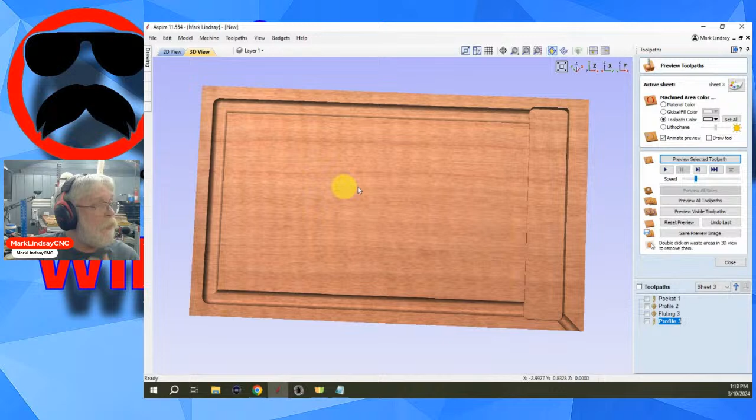You can get as fancy or as plain as you want to get. But I will say that a lot of it has to do with this fluting toolpath in making tapers, clearing out pockets, or just simply creating decorative flutes and reeds. For example, I didn't get into it. We're running low on time because I have a few questions I want to answer that aren't on the fluting toolpath.

We could take a 1/4 inch roundover bit. It's going to have a 1/4 inch radius. And we can create vectors a 1/2 inch apart. We're talking a point cutting roundover bit. And we can use either a profile toolpath or a fluting toolpath to create that reeded surface.

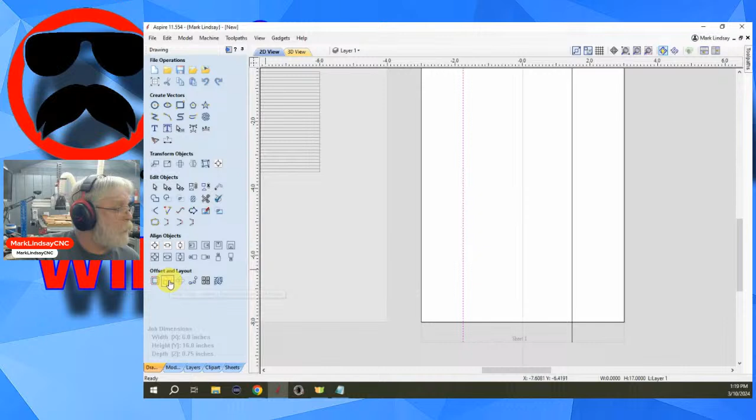So let's close this and shoot over here. I will get to your questions in just a minute. I want to go with 1 column in Y, 4 columns in X, and space them. We're moving to the left, so that's a positive move, 0.5 apart.

Copy. Where did we go? Oh, my offset is in Y, that's why. My offset should be in X. That should be 0, and we go at 0.5. Now let's try that. Oh, that works so much better.

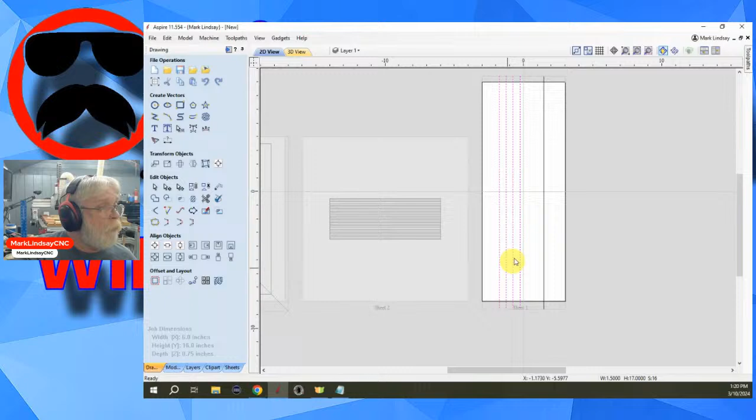There we go. So I can take these vectors here and either use a fluting toolpath, or I probably would use a profile toolpath for this now that I'm thinking about it. Yeah, let's do that. First, let's move those over off of my original. And I would use a profile toolpath for that.

I'm going to make them a 1/4 inch deep. I'm going to select my 1/4 inch round over, point cutting round over bit. Select on the vector. Okay, ignore the duplicate vectors. And preview.

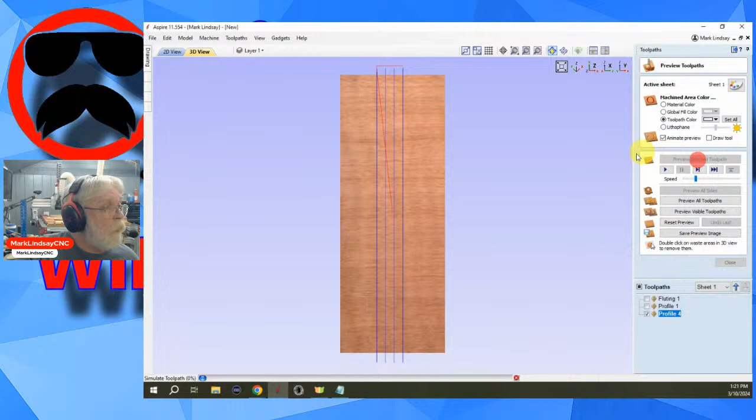Let's speed this up. There we go, and there we are. We have a reeded surface using the profile toolpath and a point cutting round over bit.

So there we go. That was kind of outside of the scope of the fluting toolpath, but the point remains that the fluting toolpath can be used for various details. It can be used to create flutes and reeds, it can be used to clear out large pockets, and it can be used for creating tapers and other elements that you're already using them for.

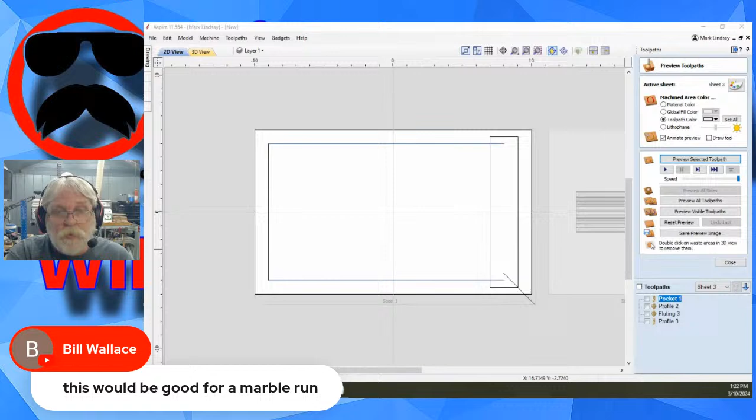Now we're just kind of scratching the surface, but somebody commented that this would be good for a marble run. Marble run, yes, Bill Wallace, this would be good for a marble run. It would absolutely be good for a marble run. It just depends on where you want it to go and how you want it to get there.